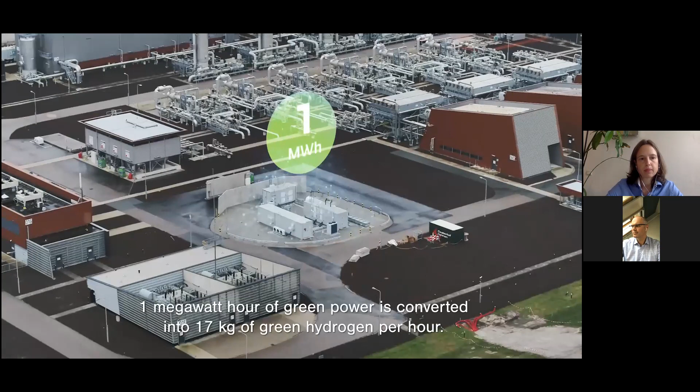Gasunie and its subsidiary EnergyStock have built the first 1 megawatt green hydrogen installation in the Netherlands near its underground gas storage in the province of Groningen. The unit uses green power to separate water into green hydrogen and oxygen in a process called electrolysis. 1 megawatt-hour of green power is converted into 17 kilograms of green hydrogen per hour. To achieve this, around 3,600 solar panels are being installed on the storage site. In addition, the green hydrogen installation is also connected to TenneT's high-voltage electricity grid, through which green power is delivered.

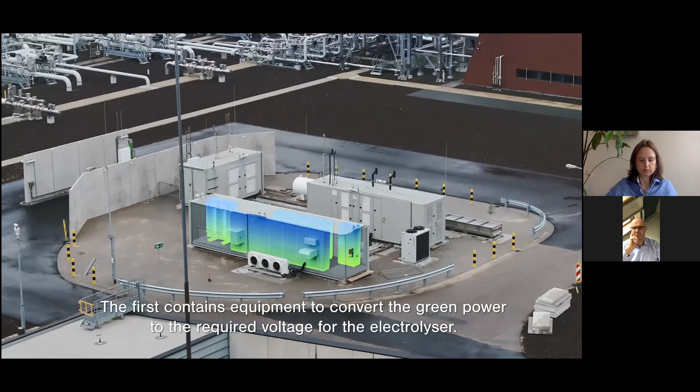3 containers are installed on site. The first contains equipment to convert the green power to the required voltage for the electrolyzer. The second contains the electrolyzer, in which water is separated into hydrogen and oxygen. The third contains the compressor, which brings the hydrogen to the correct pressure, varying from 200 to 300 bar. The hydrogen is stored in a trailer capable of transporting 800 kilograms of hydrogen to customers in the mobility sector or industry.

In the Netherlands and other countries, filling stations are being developed where cars, buses, and other heavy-duty vehicles can fill up with hydrogen, for example, at Green Planet's filling station in Pesse. Filling up takes around 3 minutes, the same as for petrol and diesel cars. A hydrogen car can run for approximately 500 kilometers on a 5-kilogram tank of hydrogen. Green hydrogen can be used as a renewable resource or fuel by the industry. Currently, the industry already uses large quantities of hydrogen as a resource.

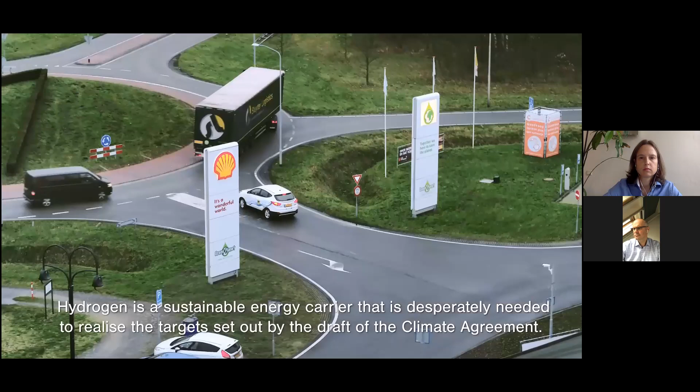Hydrogen is a sustainable energy carrier that is desperately needed to realize the targets set out by the draft of the climate agreement. It is CO2-free energy that can bring a balance to our future energy management. The aim of the HyStock project is to boost the green hydrogen market and provide the Netherlands with proof that green hydrogen works. It is an important step towards the large-scale use of green hydrogen in the Dutch energy supply.

I seem to have lost sound. Do you still hear me? Yes, we can hear you. Okay, perfect. Then I'll continue.

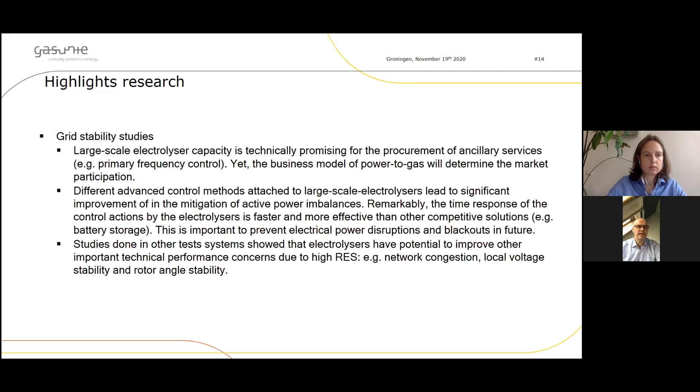And I think one of the important things in the end is if you look to the next slide, where we can find the highlights from market research. I'm gonna have to ask you to start coming to a close. Sorry. This is my final slide, so no problem. As I would say, 10 minutes is way too short to share all the information with you.

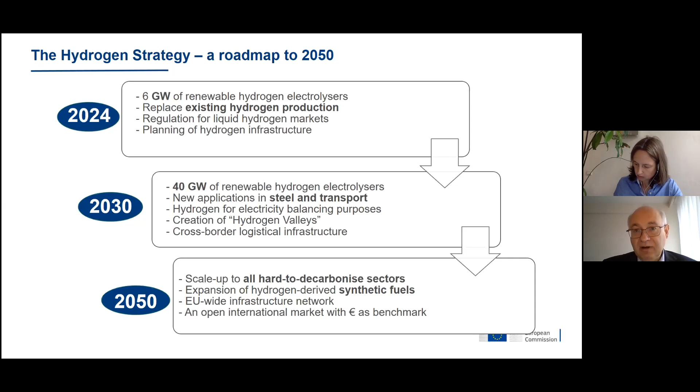Also, in this context, of course, we looked at digitalization and the possible links we need to make between the concept of sector integration and digitalization, which are the two main opportunities for making the energy transition successful, involving also consumers at a more distributed level of generation, so decentralized and making them prosumers, but also creating these opportunities of better integrating and planning the energy carriers, the energy infrastructures and the energy resources. And this is what we continue to do in the hydrogen strategy.

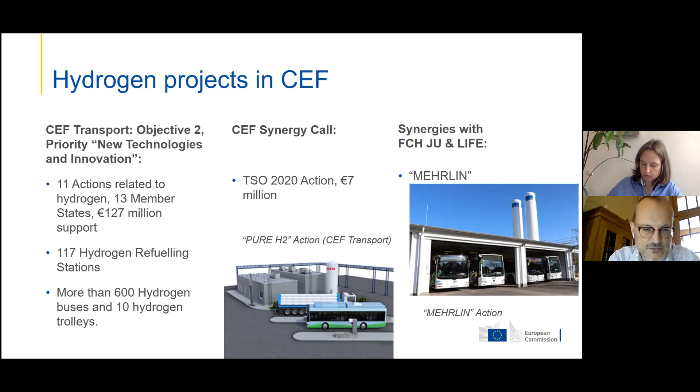Next slide, please. So I think Tudor covered this very elegantly and very competently, so I don't think I need to say anything, just maybe the last one. Yes, there will be financial support under CEF2 also to contribute to the hydrogen infrastructure, and this will be detailed more in my next slide.

Sonia, you pointed out that we are still waiting for the green light, and there's a European Council starting tonight, and we still need a bit of homework, I would say, to get there. But I think the figure we are putting there, 28 billion euro, is the figure we are expecting as money for grants under CEF2 handed over to us in INEA. This is, of course, the money serving the entire Connecting Europe Facility. So it is there to develop and modernize the networks in transport, energy, and digital.

We will, of course, focus also now on cross-border cooperation in the field of renewable energy. And I think we saw also some good perspectives from the TSO 2020 projects, how to go further. And of course, we promote sustainable mobility because we are definitely part of the European Green Deal. European infrastructure has to become green. Otherwise, there is no European Green Deal, and we would like to push our decarbonization commitments. And obviously, resources are scarce. We don't have too much money for what the needs are. So therefore, we have to emphasize the synergies because then we can make a better use of our money.

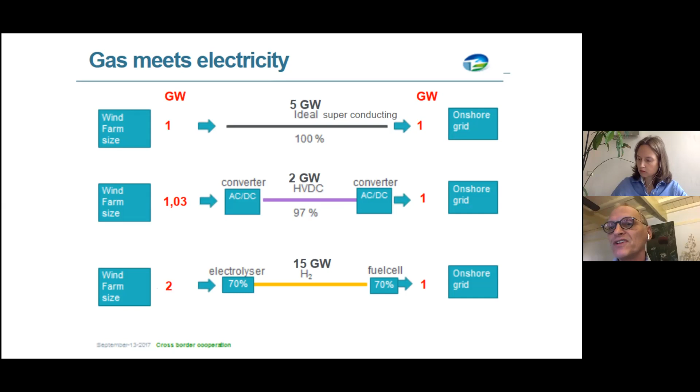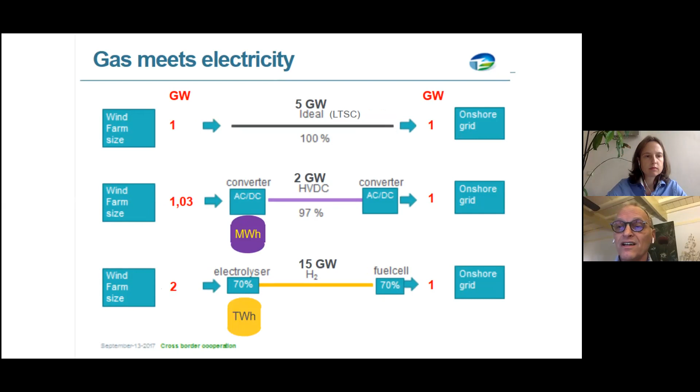One of the benefits of hydrogen is, of course, the huge transmission potential, 15 gigawatt in one pipe, compared with 2 gigawatt in a HVDC cable. Next slide, please. And another benefit is the large storage potential. We talk about terawatt hours in hydrogen and megawatt hours and some hours or days in electricity. So there's a 1 million factor difference. So there are some issues you have to take care of, and there are quite a lot of benefits in hydrogen system. Next slide, please.

So that means hydrogen and its synergies with wind, heat, power, and solar bring affordable, sustainable, and resilient solutions for 2050. But first, what we have to do is something close to reality today. Next slide, please. And I will come back to it a moment later.

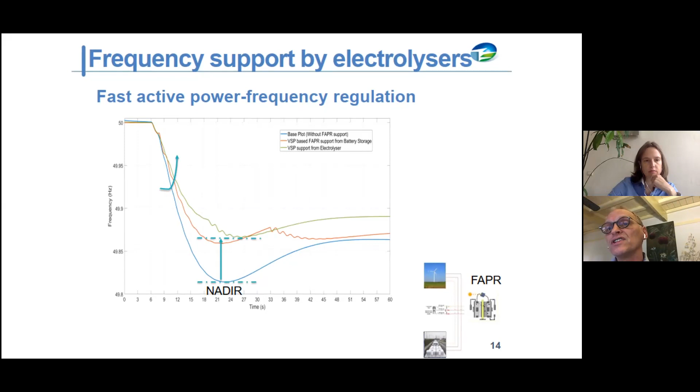Then here, how to manage congestion. It's not by producing electricity via hydrogen, but, for example, if you have offshore wind and you bring it to the shore, we have already storage capacity and usage in the harbor of Rotterdam and storage in the north of the Netherlands. So there you can place electrolyzers, and by that you produce hydrogen and you reduce the transmission of electricity into the grid. This is really a cost-benefit approach.

And the other one is what I showed with these future cities based upon microgrids. So today we should concentrate on first electrifying the industry, produce hydrogen close to the industry, close to the coast and close to the storage. And later on, you can go more deeply inland. And that helps also the power system. Next slide, please.

Finally, I was talking about new solutions, thinking from the uses, as also Jutta Paulus did. I would say uses is the key to come to new solutions.

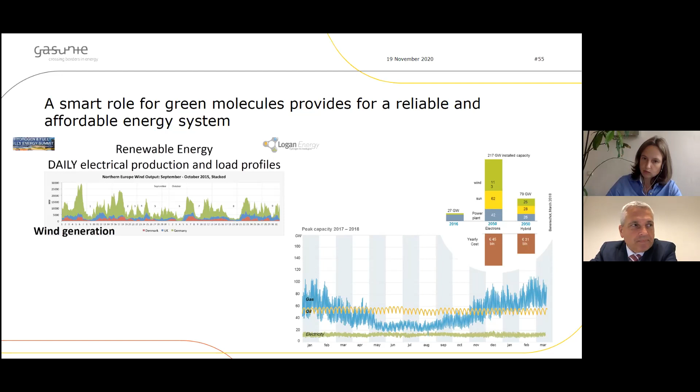This basically shows the opportunity that we have in Europe. And I think it's already said in the beginning. We are perfectly located to build industry and to build our environment towards a renewable energy system and towards a decarbonized energy system. We have a lot of solar and wind resources either in Europe or nearby, in North Africa predominantly, or Portugal, south of Europe.

We have large infrastructures that become available in future, partly because we're going to change our energy system. And we have a lot of opportunities to store gas in salt caverns, which at this moment in time at least looks the most promising way of storing large volumes of gas. Former gas fields seem to be less suitable for that as it looks right now.

So we have this opportunity, and this also means we have the opportunity to build our economy around that, and to build also companies that can provide our technology to go into the energy transition. Going to the next slide.

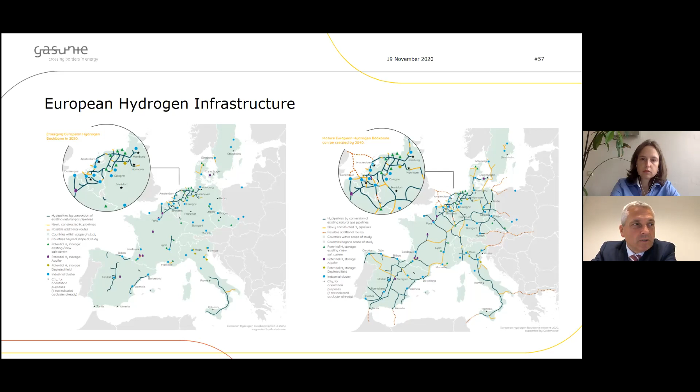So what we can do in the immediate time is to build, let's say, the infrastructure connections to be able for supply and demand to meet. Obviously, this should be done in steps, phased. You don't build the full system at once. It's only to be built at the time that you need it. But you should start with small ecosystems to build up the full value chain from supply to demand. Going to the next slide.

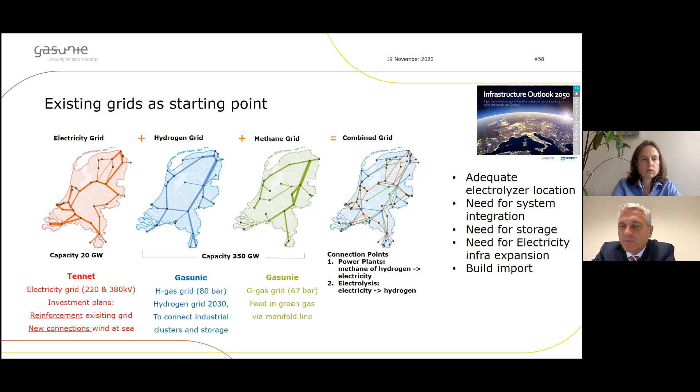We have now pillars of energy being electricity, being heat, being gas, but we need to integrate the system and provide the energy that is needed to the end users. There's need for storage, already discussed it. There will be an expansion of electricity infrastructure to come from the 80-20 to say the 50-50, and we need to build import. It's not a self-sufficient system that we have currently in Europe for energy supply, feedstock supply, and that's also not what we will have in future. But this is what we need to build, and we need to cooperate on the different lines to bring this together. Please go to the next slide.

One of the examples of the cooperation is at the front end of electricity, where electricity is made, renewable energy via offshore wind in Northwest Europe. Southern Europe, it may be more solar. What we need to find out is the most efficient way to build these new wind farms and to connect them to, in the end, the energy demand. It can be done via electricity cables, but it can also be done via hydrogen, because at some moment in time, we need to cater for the fact that we have intermittent production on the one hand, but also a very seasonal pattern in use of energy. So we need to cater for not only the takeoff, the supply of the energy, but also for the storage of the energy to make sure that we have sufficient energy available at the time that we need it.

This should be done in a broader sense, not country by country, but it makes sense to do that more on a European level, to work together, like in this example of North Sea Wind Power Hub with the surrounding countries around the North Sea to build and construct the offshore wind, and together build also the infrastructure to bring the energy to shore.

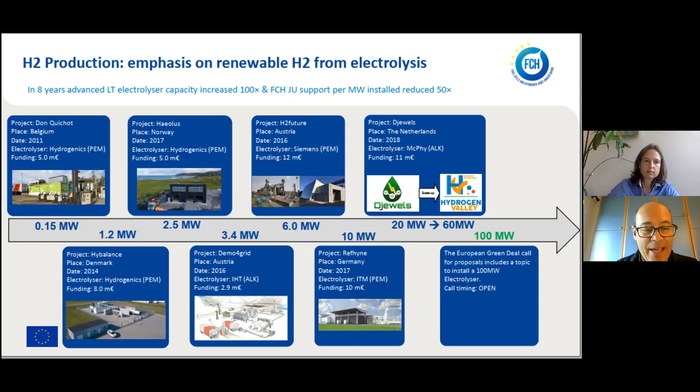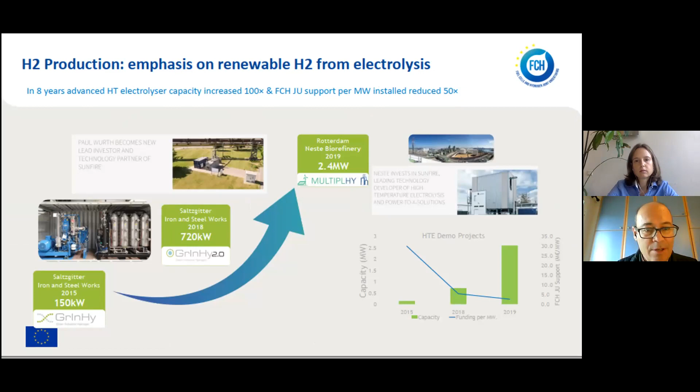Mentioning Djewels, I think I very much better understand Djewels, having heard of the TSO 2020 project and how it created the environment for Djewels to be successful. Next slide, please. A similar picture for solid oxide high temperature electrolyzers. We have now contracts with 2.4 megawatts, which is really impressive. Europe being a leader in electrolysis, low temperature, high temperature. Next slide, please.

But the emphasis nowadays is for heavy-duty transport applications, trucks, utility vehicles like garbage collection trucks, buses. Europe very strong in this, more than 10 bus OEMs developing hydrogen fuel cell buses. Trains, again, Europe a leader. And recently, maritime applications, hydrogen being used also as a prime mover at the few megawatt scale. And a bit more long-term, it's aviation, either on an electric platform, hydrogen fuel cells, or combusting hydrogen as fuel in jet engines.

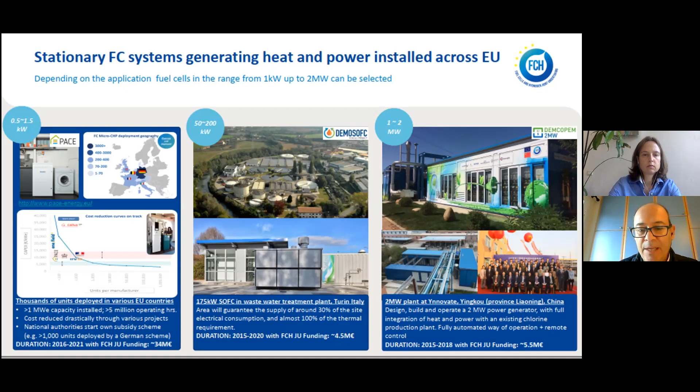Next slide, please. We have also supported the application of fuel cells in stationary applications, like at the left-hand side, homes, small power fuel cells, or in the middle, in buildings or in industrial facilities up to 200 kilowatts. Both small and medium-sized are running on natural gas. But coming to the right, the 1 to 2 megawatt stationary fuel cells, these are PEM running on hydrogen, and this is actually byproduct hydrogen, and our projects are realized in China, in chloralkali plants. Next slide, please.

Cross-cutting projects, briefly to mention the topics, it's regulations, codes and standards, education and training, very important, more than 3,000 people have received education now on these subjects. Safety, a very key, important topic. Social awareness, public acceptance, sustainability, and recyclability of the different materials, and development of databases and monitoring. Next slide, please.

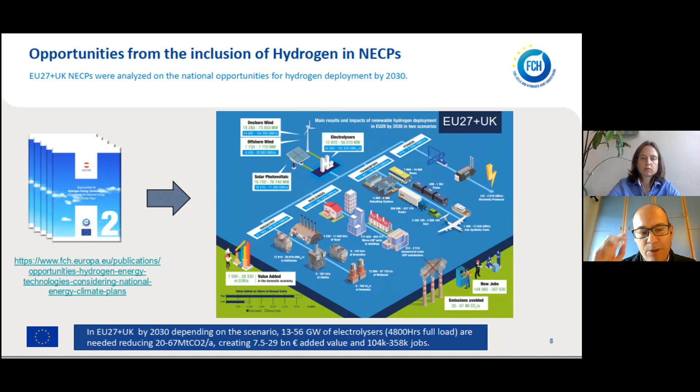If you visit the website, you will also find the full report covering the whole of Europe and also the fiche for your country. Next slide, please. Another important initiative for creating a marketable product that can also do cross-border trading in terms of renewable hydrogen is to establish a guarantees of origin scheme for hydrogen, for green and for low carbon hydrogen. And this we do through the CertifHy study initially, and currently it's another contract. We're currently at CertifHy 3, which aims to set up a platform across Europe.

Next slide, please. We already heard about the EU Hydrogen Strategy and the Clean Hydrogen Alliance from Tudor, the 3 phases. Just to mention perhaps the second phase, by 2030, a 40 gigawatt target, which very much relates to the 13 to 56 gigawatts we heard from the previously mentioned study. Next slide.

In the future, there will be more opportunities for funding hydrogen. Under Horizon Europe, there will be the continuation of the FCH JU that will be called the Clean Hydrogen Partnership. And there will be, of course, as we already heard, CEF2, the Innovation Fund of DG CLIMA, and DG GROW that is supporting the important projects of common European interest. We already heard about the Green Octopus from the Netherlands.

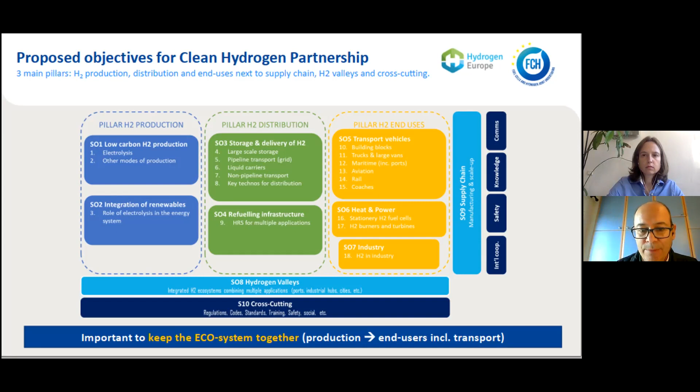Thank you very much, Nicolaus, for talking us through what we can expect from the Clean Hydrogen Partnership going forward. I propose we take a couple of questions now, and I've got at least one for you, Nicolaus, which comes from Marieke Reijalt, from the European Hydrogen Association, I can't remember the exact title. She wants to confirm if the joint undertaking has to date funded 50% of CAPEX for mobile and stationary equipment, electrolyzers and so forth, and if that's also going to be the case in the current call for the 100 megawatt electrolyzer.

We have funded up to 100% of the cost of developing electrolyzers in research projects, up to 70% in the development and demonstration of electrolyzers in demonstration projects. And there it depended on whether it's a commercial electrolyzer, where it's just the depreciation that we support, or if it's a novel electrolyzer being developed in the context of our project, where we fund the whole unit. And in the Green Deal call, I understand funding is mentioned to be between 25 and 35 million euro for the 100 megawatt electrolyzer.